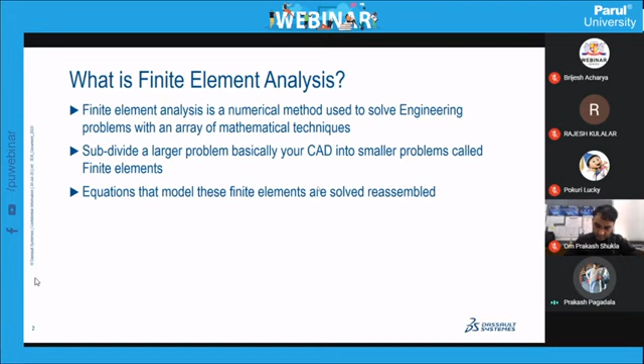Let's begin with what finite element analysis is. If you go to Wikipedia or open any book, finite element analysis is a numerical method used to solve engineering problems with an array of mathematical techniques. You discretize a large problem or a large CAD model into discrete elements called finite elements. Then you solve the equations for these elements and reassemble it. This is what you learn

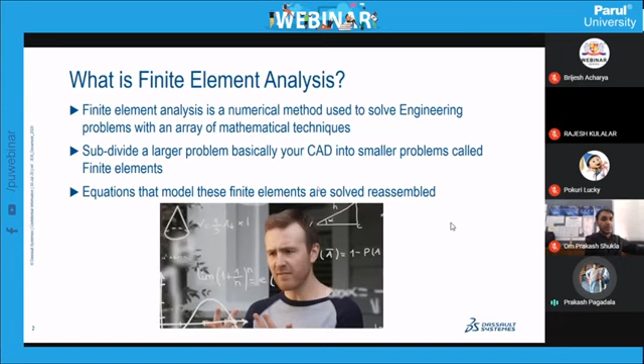in your books. But isn't it pretty confusing for graduate students? When I was in graduation, this was like some alien language for me. So I thought I'd learn in a simpler way rather than a complicated equation manner, and I started framing it for my own understanding. Let's break it down simply, okay?

You have a tree outside, and you're standing next to it. In a tree you have different components: branches, a trunk, leaves, flowers, fruits, roots, etc. All these components respond differently to the environment and also to you. If you pull a branch, it will bend, or if you take a leaf, it will crumble. But try hitting the trunk of the tree, what happens?

You're going to break your leg, okay? And why is that? Because the geometry and the materials of the different components are different. The materials are different, the shapes of the components are different, and how they respond is also different. The trunk of the tree is made of hardwood, while the leaf is made of much softer

material. If you break it down into basic components, you have the geometry of the tree, the general shape, and you have the materials. So within the FE world, these two things are really important: the geometry and the material. Geometry can come from CAD, and material you can imagine as something that fills the geometry. It can be steel, rubber, wood, or some composite material. It can be anything. So it is a fill.

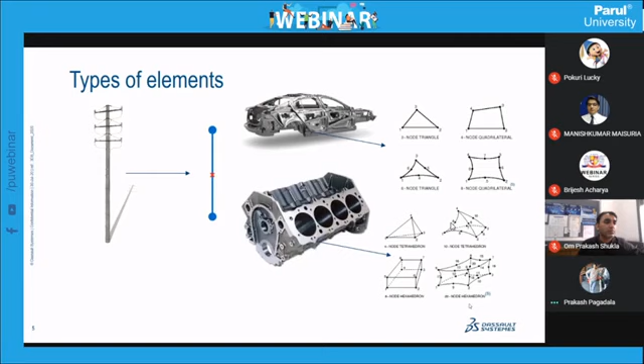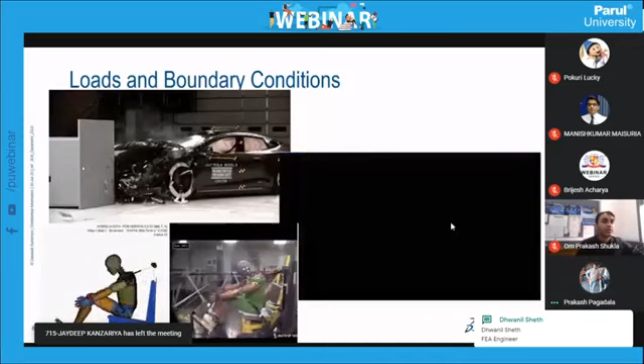Now, once we discretize with the elements, the next important thing is the loads and boundary conditions. What you see here is a car crash. You need to tell the solver, this is my boundary condition. The wall is a boundary. The car will hit the boundary at a particular speed, and the velocity will be the load for the analysis.

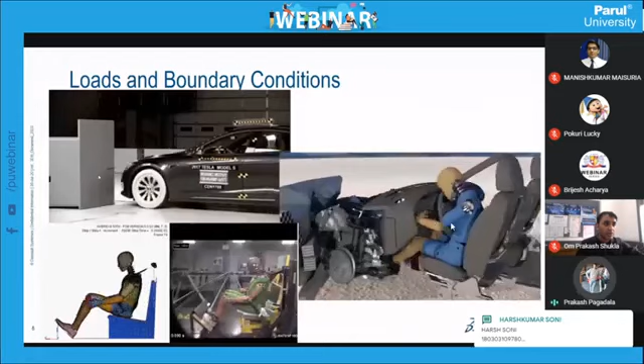So once you discretize, you tell the solver, this is my geometry, this is the discretized model, and the model possesses so and so properties like 2D properties or 3D properties. And this is the material I'm going to assign to these elements or fill the geometry with. Then you set up your loads and boundary conditions, where you tell the solver this is a constraint or this is the boundary condition.

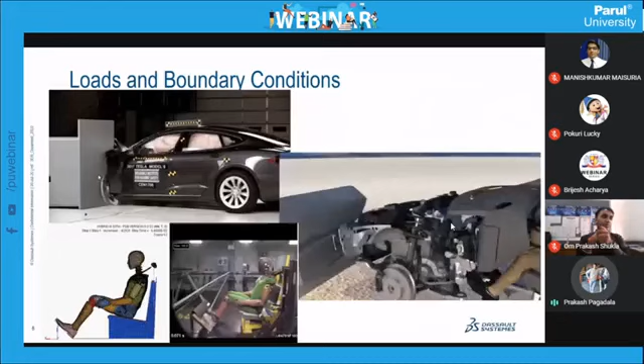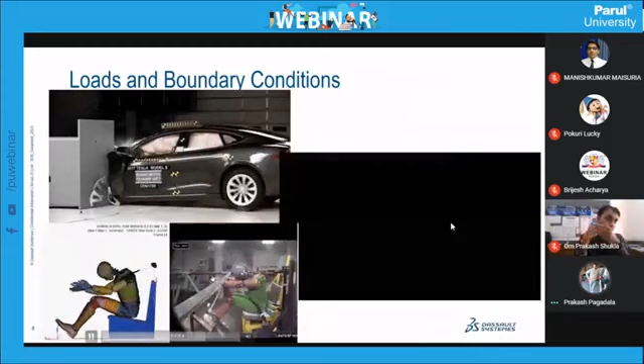The wall, for example, in this case, or if you look at the seat belt here, it crashes with the velocity. You're providing some loads and boundary conditions. This is the next step. This is how you start progressing from your CAD geometry to finite element geometry. Next is what solver you need to use.

Now, yesterday we discussed that we have different solvers like implicit solver and explicit solver. Now the question is, okay, now I have modeled everything. I have my geometry. I've discretized my geometry into finite elements. I've provided 2D elements, a 2D property with a thickness of 2 mm, and I have assigned a material to this. But what solver should I use?

That's the next question. Type of solver depends on the type of application where you're going to use it. For example, if you're interested in a high-speed dynamic event like a crash event or a drop test, like you're dropping your phone on the floor, the event time is like in milliseconds. So for high-speed dynamic analysis, we use explicit solver, and implicit solver for static or quasi-static simulations, linear dynamics. For such cases, we use implicit solver in Abaqus.

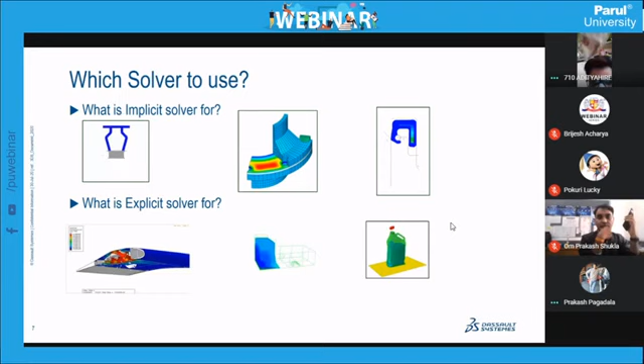So Abaqus has Abaqus Standard and Abaqus Explicit. Abaqus Standard is used for implicit applications and linear dynamic applications, whereas the explicit solver is used for explicit simulations like high-speed dynamic and nonlinear dynamic simulations.

So now let's see a couple of small demos on how we are going to use Abaqus for this. For these demos, let's start with a small demo.

Okay, just give me a minute. I'm pausing my presentation to open the Abaqus application. Okay, I hope you can see my screen now back again.

Okay, when you start Abaqus, you'll be asked what type of solver, or what type of model database you want to create. Since we are interested in structural simulation, we're going to select Abaqus Standard or Explicit. Now, this is the Abaqus CAE, which is a preprocessor.

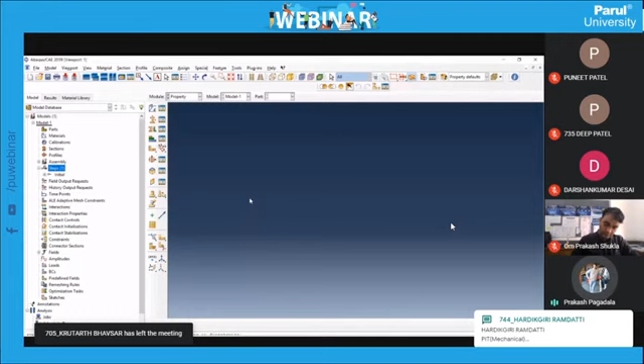Next is the property module. In this module, once we have created a part, let's say I have created a 3D block, the solver will not understand what exactly it is. So I'm going to tell the solver using the property module: this is a 30 by 30 by 30 block, which is a solid. I'm going to provide the section properties, like telling the solver this is a solid part.

And I'm going to assign some material. I'm going to tell the solver, this is my material, steel, for example, and these are the properties which the part will have, like Young's modulus and Poisson's ratio, etc. I hope you can see this here. So I'm going to tell the information like this.

Next is the assembly. Now we have different parts. I'm going to bring all the parts into the assembly module and I'll assemble them. I'll arrange them in a more logical sense.

Next is the step module. This is where I'm going to tell the solver, this is my block or this is my assembly, and I'm going to run a frequency analysis, for example a modal analysis, or a linear static analysis, or a transient analysis, through the step module. I'm going to create a, for example, 1 second.

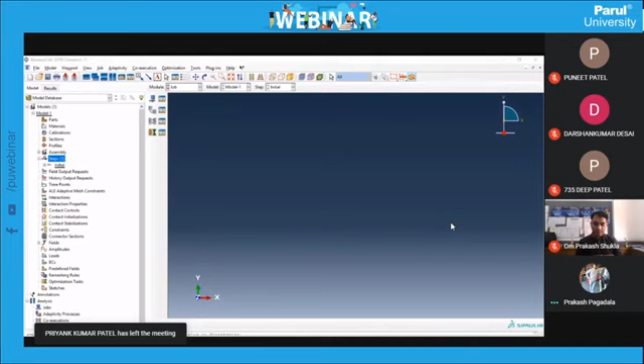After that, we have visualization, or post. This is where we post-process. Once we have a pre-processed model, we submit it to the solver. The solver did all the simulation and calculations, and it has given us a result: I've calculated your beam problem, now take the results. It will create a result file for us.

We'll take this result file into the Abaqus viewer, or visualization module. Then we are going to see the displacements for a particular given load or force, or the stress, for example, whatever we are interested in. I hope you understand the different modules which I have explained.

Let's start with creating a sample problem, or a set of problems, not just one, to get a taste of different types of simulations, maybe 3 or 4 simulations, maybe one optimization as well. We are going to start with a simple plate problem. My plate will be a 2D plate, which is a thin sheet.

So in the part module, I'm going to create a plate. Okay, this is a thin sheet. I hope you can see this. Okay, now I've created this. Now I'm going to tell the solver, okay, I've created a plate, or this is my geometry. Now I need to tell the solver what is the thickness of it. I didn't mention any thickness here in the part module.

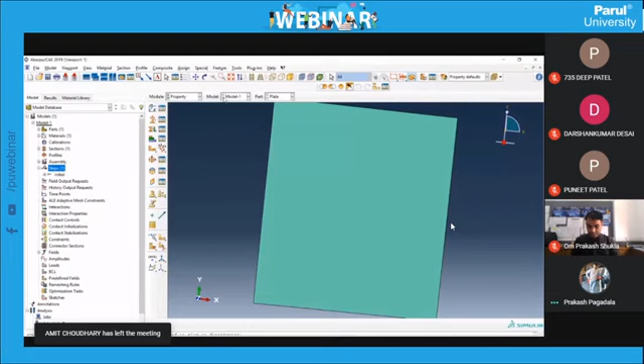Next, we are going to assemble. Since we only have one single part, we are not going to go in details, but we'll discuss this later. Now, next is what type of simulation I'm going to use. I'm saying I'm going to use a static simulation for this. Static simulation is where your geometry and your... linear static is nothing but where your loads and material are linear. You are applying at one single instance. So this is what we call static, and dynamic is like transient dynamic, where your load may change with respect to time or frequency. That is a different discussion again.

Okay, I'm saying I'm dividing the load into increments. 10% for each increment. Since we only have one single part over here, we are not going into the interaction module. Next, we are going to create the loads and boundary conditions. This is where we are going to tell the solver where I'm going to fix it and where I'm going to apply the loads.

Okay, so I'm saying force. Continue. Okay, I'm going to apply some load here and here on these two nodes. This will ask me how much load I need to apply. I'm going to apply in X direction. You can see the three axes here, X, Y, Z, and you also see a compass over here. This will come in handy. I'm going to use 10 newtons of load. Okay, you can see the representation of the force here.

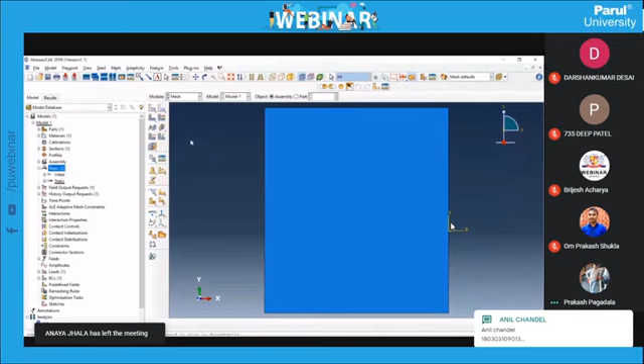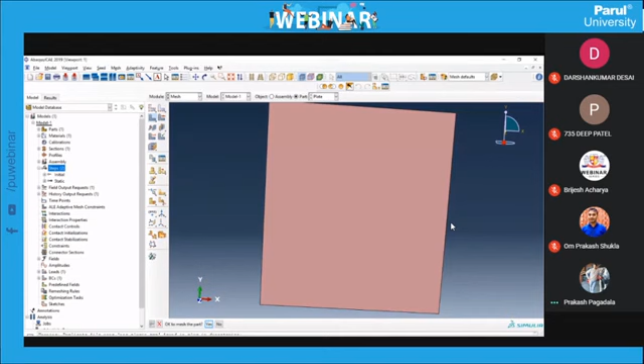So as I've said, each element has a set of nodes associated with it. Now we're going to tell how many nodes, what is the size of... okay. Now we have discretized it with so and so element size. You can see it here, right? So here you can see the approximate global size is 5. So the average size of my element is 5.

Okay. Now once we have meshed it, that means we have discretized it, next is to run the simulation. We are going to the job module. We're going to give a name to it, plate for example. And I'm going to use more number of CPUs. It's like you're using more number of brains. So this will help me to speed up my simulation.

Once you submit it, it will start. It will communicate with the solver, and the solver will calculate the equations. It will do the math in the background and will give us the result at the end of the simulation. You can see it is running. The simulation is completed. You can see it in the status.

Then we'll go to the visualization module. Now you can see how it is deformed. Since we applied the load only on the 2 nodes of this plate, only the nodes are pulled. Okay, so this is how you model in the Abaqus CAE or Abaqus GUI. This is a simple problem we have just created.

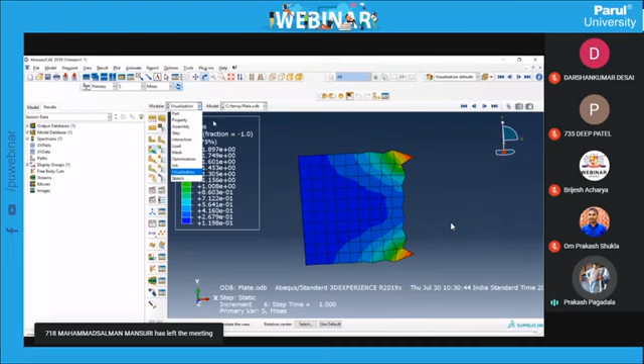Now let's do another simple analysis on the same plate problem. We'll do some frequency calculations. We'll remove the force over here and do a simple frequency analysis. I'm going to the step module. I'm just simply changing it. I'm going to replace it with frequency. This will ask me for the minimum frequency of interest. I'll say 1.

I'll provide how many frequencies I need, number of eigenfrequencies requested. I'll say 10, for example. So I'm going to ask the solver to give me 10 available frequencies starting from 1. And then I don't have to do anything now. I'll just go to my job manager again. I can resubmit it, but I'll not do that. I'll create a frequency job, rename it, and submit it again.

So for the same problem, without doing anything, I've just changed the step or the type of analysis. That is the beauty of finite element simulations. If you're doing this in a real problem, you might have to do a lot of iterations. There are some warnings over here. Maybe I've made some mistake.

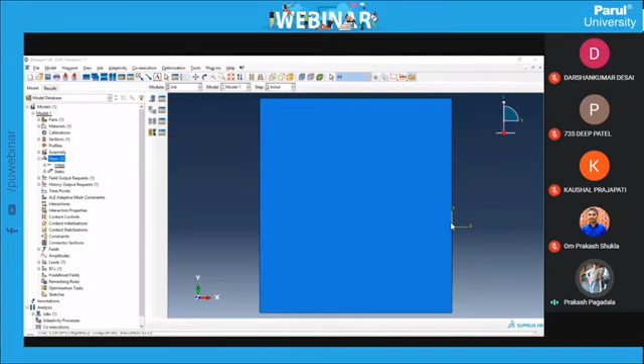Now, if you have to do the same in a real problem, you need to do a lot of iterations. Maybe you need to change a lot of things here and there to change from one simulation type to the other, which might take a lot of time, money and manpower. You can see the problem is running now, and it is completed. We're going into visualization mode.

So we have the frequencies over here. We requested 10 frequencies starting from 1, and we have 10 frequencies. The first frequency is 851. The last frequency is 17430 for this particular problem. This is a different type of analysis we have done without making any huge changes in the model.

Similarly, you can create 1D elements, like if you're dealing with truss kind of problems, okay? Excuse me. And you can start modeling your problems and solving them in Abaqus.

The steps are not clear. So there's a question from Saumya Trivedi saying the steps are not clear. Can you let me know where you got lost, or from where you want me to explain? Sir, the steps when you applied the load, it is not visible. I cannot see where you applied the load. Where I've applied the load. Okay, we'll take another problem and discuss the load. Thank you.

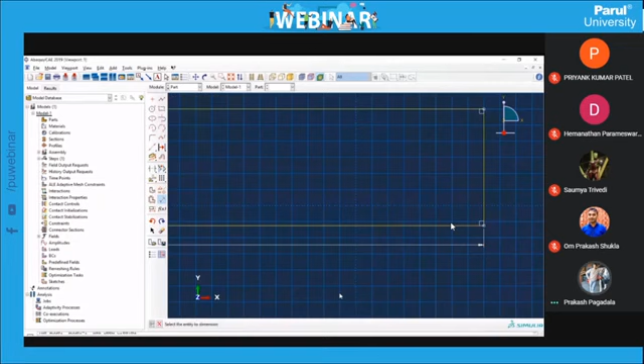Right. So we'll take another problem, a little complex; we'll have some contact in this problem. We'll start with maybe a block, which is a solid. I'm going to create a block with some dimensions in my part module. My length will be around 600, and the breadth can be around 200.

Now, since it is a solid model, this will ask us for the depth, the thickness. We're going to use a default thickness of 20 mm. Now, this is my block. Then I'm going to trim this at a couple of places for better modeling.

I'm creating some trim lines. So this will help me to... Okay, I've trimmed the block at these two ends. Now why I've done this, we'll look at in the later stage.

Now you might have heard about 3-point bending analysis, right? So we're going to create a 3-point bending with 2 supports and one block, something like this, and a load carrying block. We'll say load block, and we'll create a rigid component for this because we are not interested in the deformation of the block. Okay, let's make it.

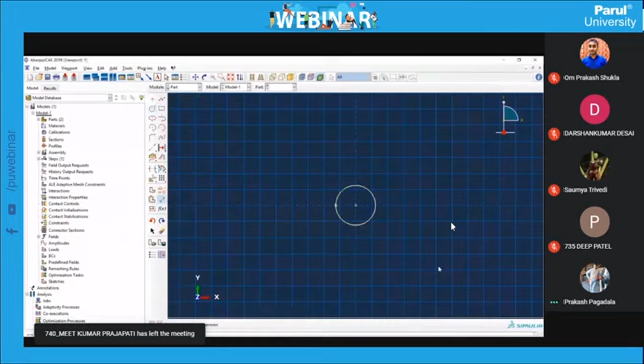I'm going to give dimensions to it and a depth to it. I'm going to give a reference point because since it is rigid, we need to provide some details to it. Now we are not going into details of what reference points are and why they are used, but for the time being, we're doing this. Okay.

Then next we are going into the property module. Since our load block and support CAD models or geometries are rigid, we don't need any material for that, because we are telling the solver these are my rigid components, and rigid components don't deform. Okay, so we are not interested in that. Now we are going to apply some material for the block. Going to use the same steel properties.

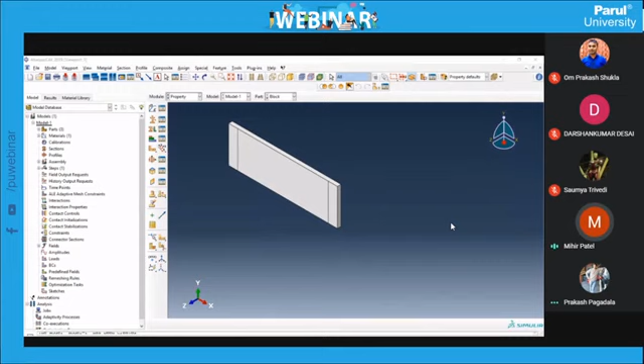Excuse me, sir. Yes. Hello, sir. Sir, actually, whatever subcommand window opens, where you are entering the material or load condition, that is not visible. Now you can see the window over here, the edit section window. No, sir. We can only see the Abaqus main model window where the slab is. That's it. Okay, let me reshare. I'll stop the sharing and I'll reshare it. Okay, thank you, sir.

Okay, can you confirm if you're able to see now? Yes, sir. We can see. Okay, now you are able to see the edit section window and everything, right? Yes, sir. We can see.

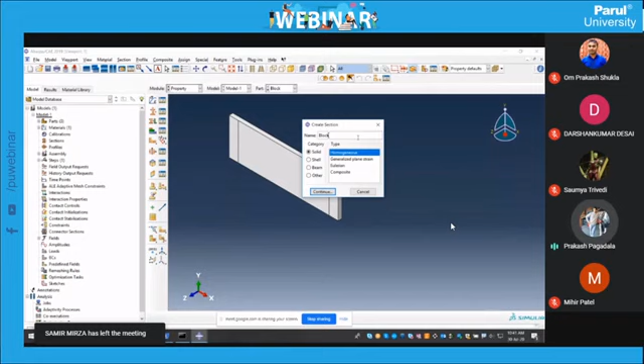Okay. So what I've done is I've created some material property, given some material details over here for steel. Next, I'm providing some physical property to let the solver know that this is my solid component. Then I'm going to assign this to my block. Done. Now we are going to assemble these three over here.

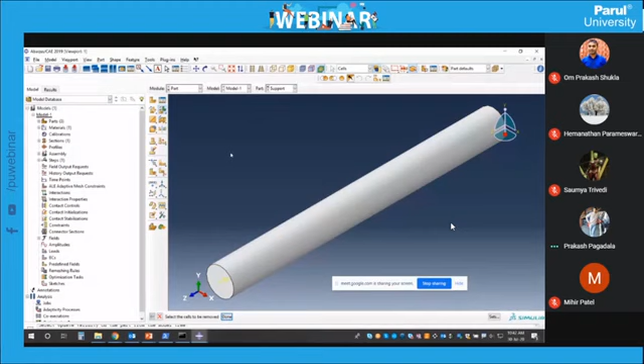Okay, I cannot use a rigid. So what I'll do is I'll go to part. Since I cannot use a solid rigid, I'm going to convert the solid rigids into a hollow rigid. Then I'm going to the assembly module. I'm going to assemble them over here. Now I have three components here. Okay, what I'll do is I'll assemble them with some conditions.

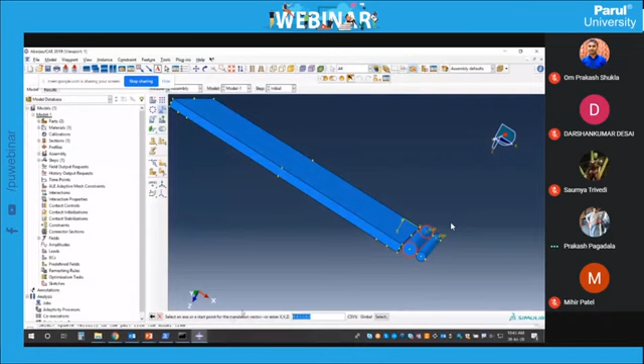This is a parallel face condition, which means the faces which I've selected should be parallel. Okay. Then I'm going to position them. I'm going to rotate this around this axis. I'm going to rotate this component, this part, by 90 degrees. And again, I'll do the same for this, for better modeling. Okay.

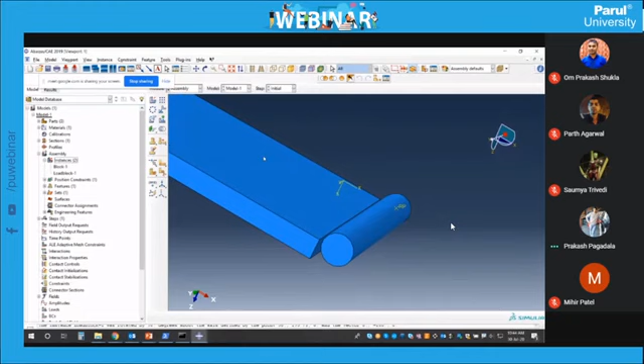Sorry. So as I've said, everything will be recorded over here. You can do any modifications anytime. Okay. First, we'll position this over here. I'm going to use the translate option over here. This will translate this over here now. Okay, have you seen this? This has translated from one position to the other position.

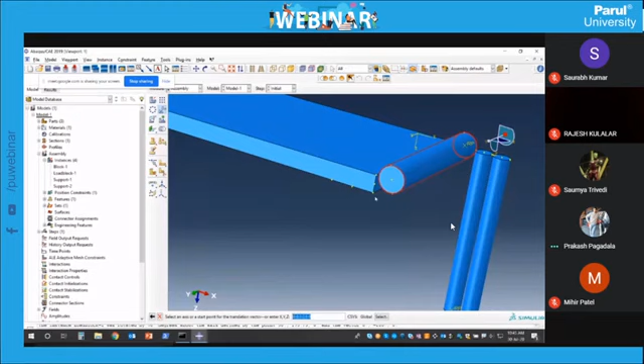Now, I have created only one support part, but I've instantiated it twice. So this is the beauty of Abaqus. You don't have to model repeated components multiple times. Okay. Done.

Then I'm going to use parallel faces for this. Again, also for this. Sorry. Okay. Now I'm going to rotate this around this axis by 90 degrees. And again, this on the same axis.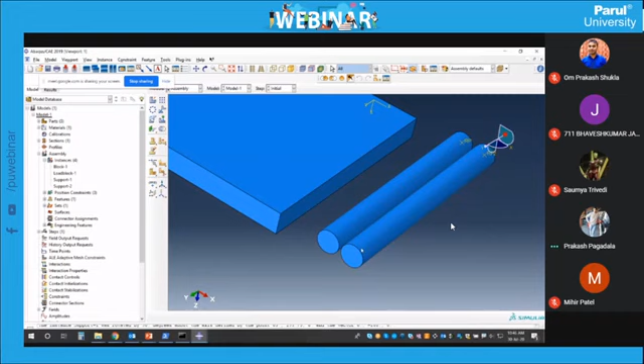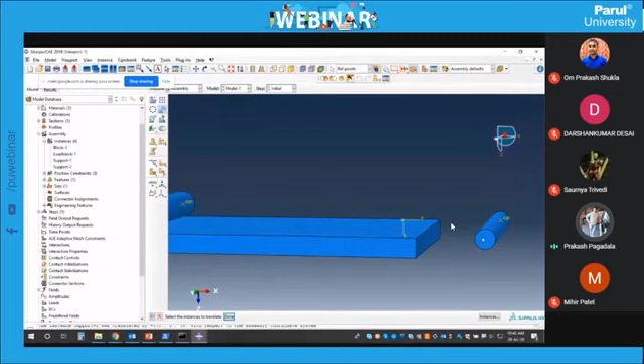Then we're going to position them using the same options we have used before. So select this point here. Okay, done. Next, we're going to position this. Okay, this is not rotated.

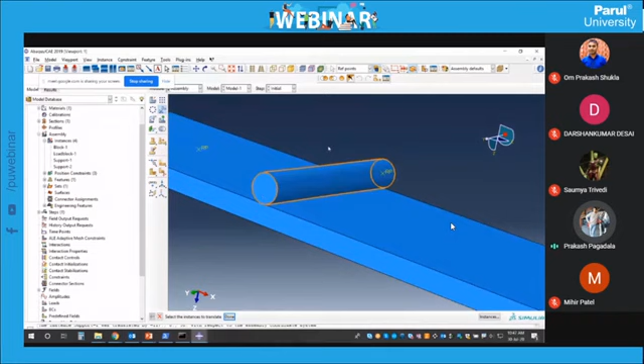Then we're going to position this point coincident with this point. Okay. Now we have positioned our 3-point bending setup. Now we have two supports and one load bearing component. Okay. So I have trimmed these lines, if you remember, at the beginning for the block, just to take a reference of this to position the supports.

Okay. Then what we're going to do is we are going to create a step for this. We're going to have a general static model, and I'm going to divide the load. So I'm asking the solver to apply 10% load, not all the load at a time, but 10% load as an increment, okay, until the full load is absorbed.

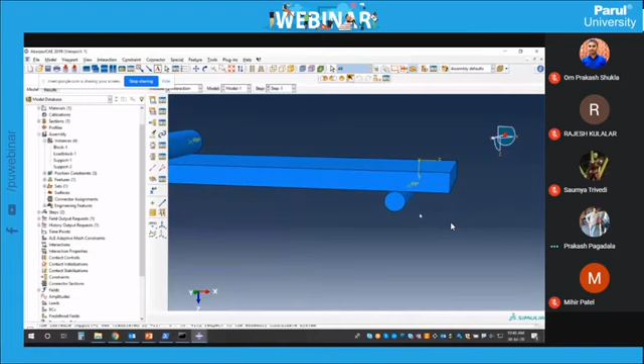Next, I'm going to create contacts. Now, the conventional way of creating contacts is a very lengthy process in some preprocessors. The process is like, you need to select the surface of one component, then select the surface of another component. You create a contact for it, then you repeat the same for this, for this, for this. Now for this component it will take at least 5 or 10 minutes for me to create. But if you have a huge assembly, it might take a lot of time for you.

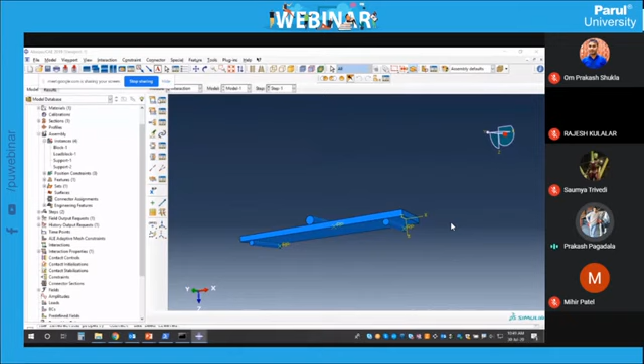Okay, so one advantage with Abaqus is we have something called general contacts, where within one click you can create contacts for the entire assembly without repeating the process. So first I'm going to create some contact properties. So I'll provide some friction to this, say 0.2. My coefficient of friction is 0.2. Then I'm going to create something called general contacts.

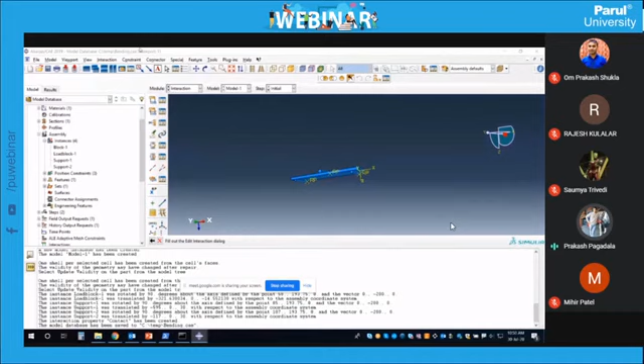Okay, looks like I have some problem with this. What I'll do is I'll save this for the time being. Okay, let me end this. Just give me a minute. I think I have some problem with the window over here. I'll stop sharing this for a minute. I've restarted because I'm running some other simulation. I had some problem with this.

So I'm going to continue from where I've stopped. So we have assembled it. Now we have also created a step. I think we also created a contact property, interaction property. Then we are going to create general contacts for this. So we are going to say general. So you can see here what you want to include in the contacts. You want to include all the components with self contact.

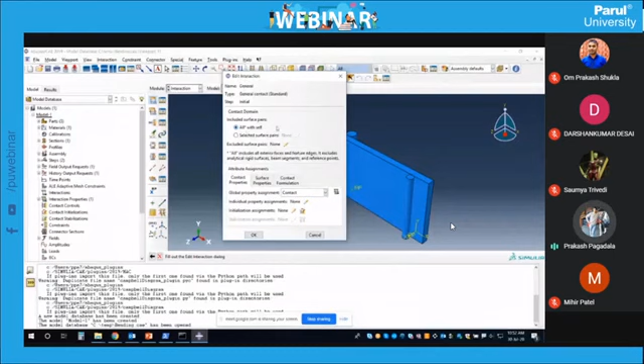Self contact is where the same component comes in contact, like a crumbling analysis. Maybe we'll look at this in the next demo. So you can imagine a crumbling or a crushing kind of thing, which is a self contact. Okay. So I'm going to tell the solver I'm going to have everything in contact in the assembly, and I'm referencing the contact properties for this. Now the interactions are created. Next, I'm going to create the loads and boundary conditions.

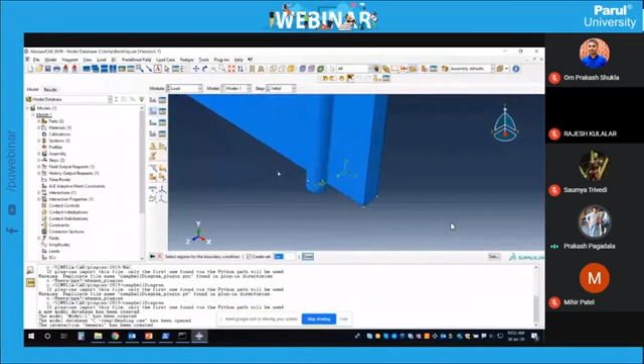I'm going to fix this and this in all directions. So I'm not allowing these rigid components to move at all. Next, we'll provide a displacement load. Okay. I'm going to select this. I need a displacement in Z direction. I'll displace it by, say, 0.5 mm. Okay, and in all other directions it is 0.

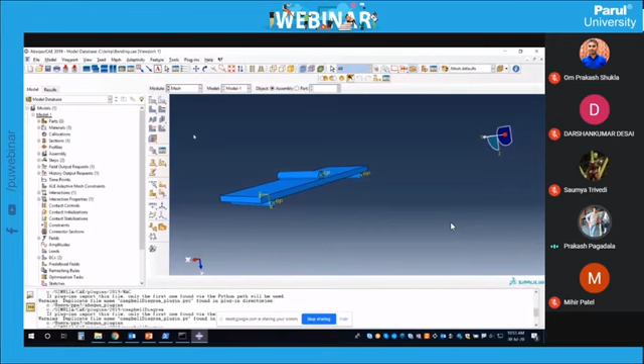Okay, now we have done. We have created the assembly. Then we created the step. Then we created the interaction, where we have created the contacts. We have created the loads and boundary conditions. Next, we are going to mesh the components. So we'll provide the basic details on our average element size, say 10 mm for this. Okay. Then we're going to mesh this part.

Then we are going to move to the load block, which is the top block we have created. Okay. Then we can go to the support block. Now, if you remember, we only created one support block, but we have two supports. What we have done is during the assembly, we have used the same one a couple of times. At one end we have one support block, and at the other end we have one more support block. That's the beauty of Abaqus, where you can create one single part and instantiate it multiple times when you have it repeated in your assembly.

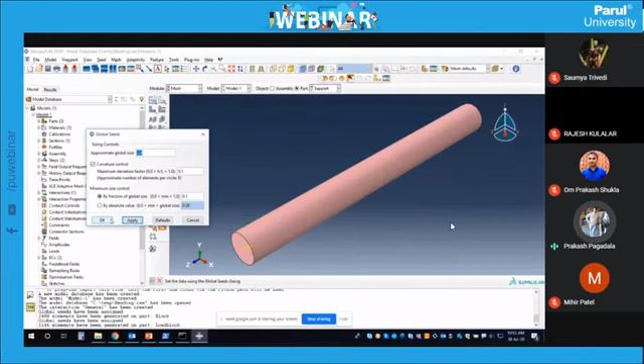Okay, and it is not necessary you need to mesh it for all. Like if I'm using it 10 times in my model, it doesn't mean you need to mesh it 10 times. Only one time is enough. So if you're meshing the parent part, it will be reflected on whatever other components you have created. Okay, so we are going to provide some details on the mesh, and we have created the mesh for this as well.

Next, now we have assembled, we have created step, interactions, load, mesh is also done. You can see here, this is the assembly, how it looks after the mesh. We're all done. Now we can go to the job module and let's create a job. So once we submit on the job manager, it will write out an INP file. This is a form of model file.

Probably I don't have any INP file over here, but what we have done is we have created this bending. So this is the INP file, .inp file, which Abaqus exports as a model file. This file will be taken to the solver, and it has all the details, like what parts we have created. We have created a part named block, and these are all the nodes for that part. Each node will have its x, y, z coordinates. This is the x coordinate, this is the y coordinate, the z coordinate, and this is the node number.

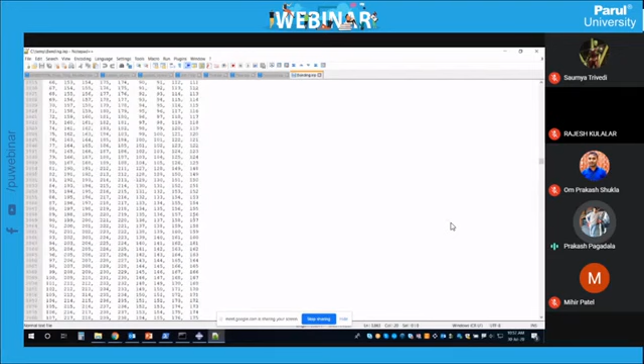Similarly we have elements. What is the element type? This is a solid element, C3D8R, which is an 8-noded 3D hexa element. Now each element will have its element number and its node IDs, and it will have other details like the general contacts we have created, and other assembly details over here.

Assembly, what are the assemblies we have created? We have a block, we have another load block which holds a load, and we have two supports which are instantiated over here. We have created some material properties, which are over here. The boundary conditions, we have displacement and fixed constraints. It is also written, and interaction properties, which are the contacts. Now everything is written. At the end it will also write out the step information.

Okay, I think I had too much load on it. This is how it will write out. So this file will be submitted to the solver, and the solver will understand what is what from this file, and it will try to calculate based on the provided inputs. What I'm going to do is

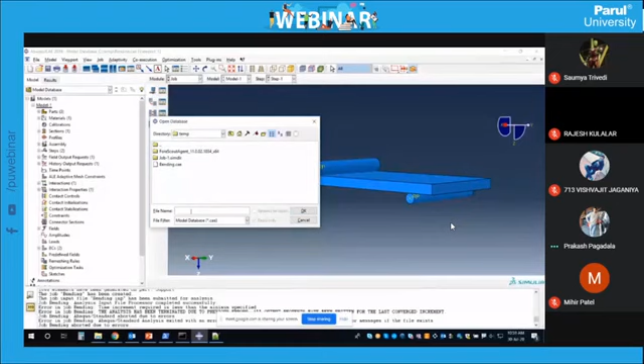Okay. So this is the result after the analysis. Now you can take the result file. Once the analysis is completed, the solver will write out the results in the form of an .odb file. This will have all the calculated results like your stress, your displacement, and everything. You can use this for further post processing.

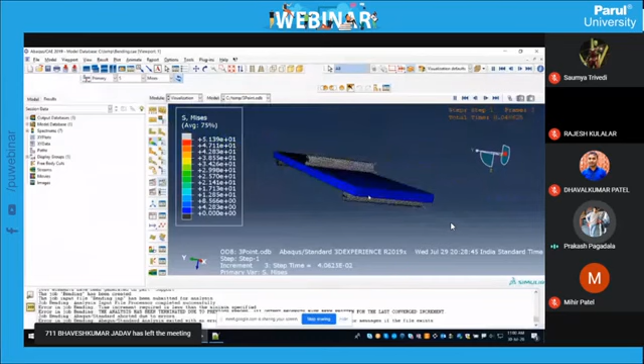This is how you model some complex problems in Abaqus. For some reason, the analysis I've carried out didn't go well, but let us not waste time on it. Maybe something to do with my contacts. But this is how the result will look once you have everything in place. Now, since this is the only deformable component in the assembly, we can only see results for this. These are the rigid components, and we are not interested in them.

Since we are only interested in the block, which is deformable, we have only created a single deformable component for a faster simulation. When you have more deformable components, the simulation time will increase. So this is about using implicit. This is more of an implicit solver, implicit simulation.

Next, we'll see explicit simulation as well. We'll try to create something in explicit. Let's see a crush analysis where we're going to use self contacts, a tube crush. So what we're going to do is create a hollow tube of, say, 100 by 100 mm, something like this. Let's extrude by 100. Okay, 100 may not be enough.

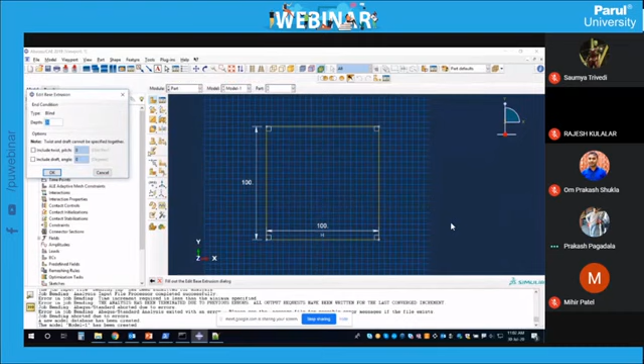This is my tube. So what I'm going to do is I'm going to crush this tube with a solid block. So for that, I'm going to create a solid block. So we have created 100 by 100 for that. So we're going to create 120 by 120 for this, so that we can have a better. We're going to create a square block, something like this.

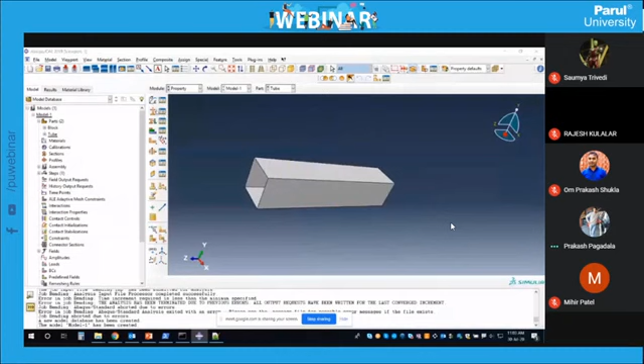Now we have created a square block, and we're going to attach a rigid reference point for this, since it's a rigid component. Then we are going to properties. Let's assign some details to this. Let's assign some material. Now we'll use aluminum material, for example. Some form of aluminum. Okay.

Let's set the Young's modulus and Poisson's ratio. We'll also provide some details on plasticity. Like we're going to include the material nonlinearity in this. Okay. Now we have created the material.

Now we're going to tell the solver what type of component it is. A shell component which has some thickness. Let's say thickness of 2 mm. Okay, and we are assigning a material to this. Then we are going to attach element and property to this. Okay, next we have the block.

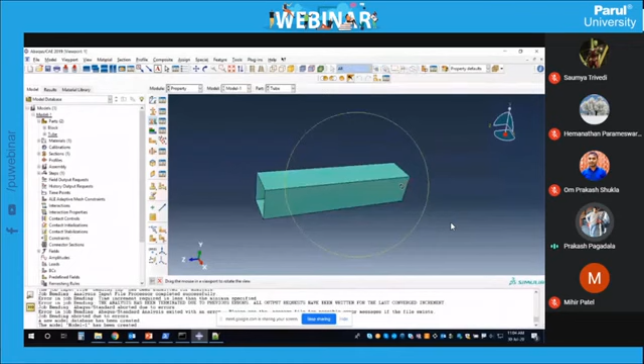Since it is a rigid component, but we are using a dynamic explicit simulation. So when you are using a dynamic simulation, you need mass. Okay, since it's a dynamic simulation where you have your inertia and everything, you need mass for this. We're going to create some properties to this. We're going to say like what is the mass? Maybe 1 ton. Okay, 1 ton, and some random shape properties for this.

Then we're going to the assembly module. We'll assemble these two. Okay, I have created a solid. What I'm going to do is I'm going to convert this into shell component, assembly. Okay. So this is how you do it. And we're going to translate this.

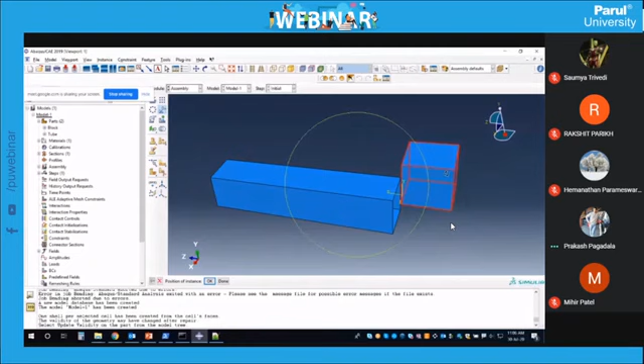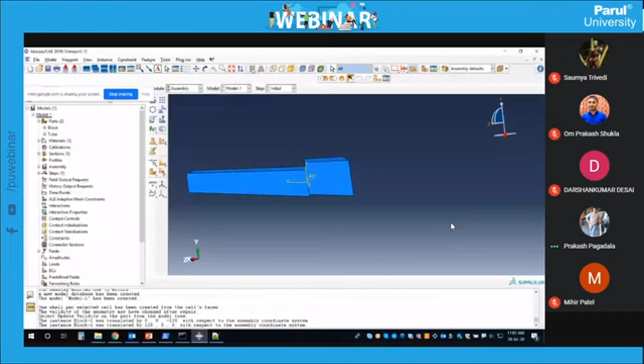Okay, again, we're going to translate this so that this is how we are going to position the y direction. I need to position this in negative y direction by say 15, something like this, but maybe more than that.

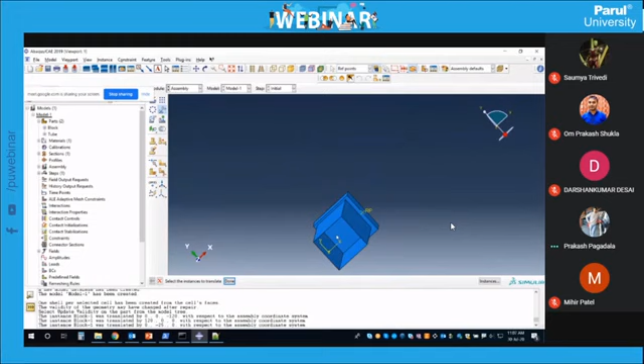And now we have positioned it. This may not be the right position, but we can actually work with it for time being. To have a little gap between these two components. Okay, now we have assembled it. Now I have a tube and I have a block, and this block is going to crush the tube.

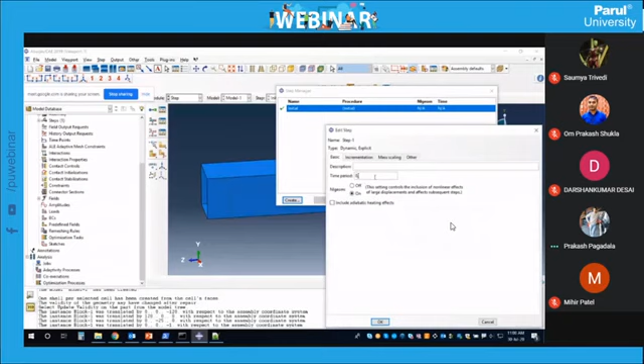So in order to get it crushed, I need to create some constraint for this and also contacts. What we are going to do is we are going to tell the solver that I'm going to use explicit analysis for a period of say 0.1. So my event time is 0.1. Okay, next interactions. I'll create interaction properties first. Some friction of say 0.1.

General contacts for explicit. Including the self contact. So once the tube gets crushed, the same component or the elements in the same tube will come in contact with each other. So this is called self contact, and general contacts will help in creating that. Next is the loads and boundary conditions.

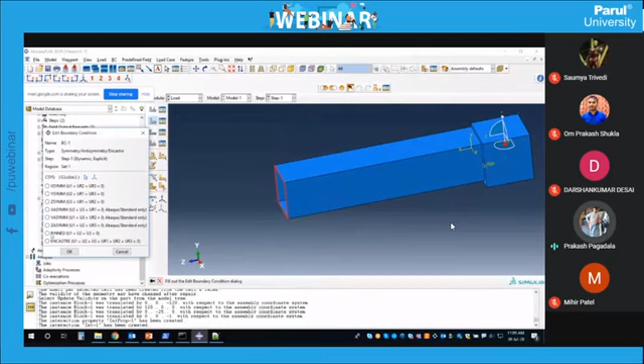What we are going to do is we will constrain, or it's like we're going to fix the edges on the other side of the tube in all directions. Okay, and we're going to provide velocity to this rigid body in z direction, say like 500 mm per second of velocity.

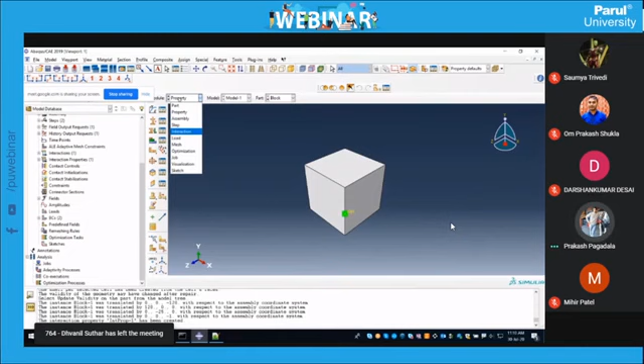Okay. Now we have created the assembly. We have provided the physical properties and material properties for the tube. And also we are going to tell the solver that this block is a rigid component and it has a mass of say 1 ton. Now we have created the loads, boundary conditions. Next we are going to mesh the component.

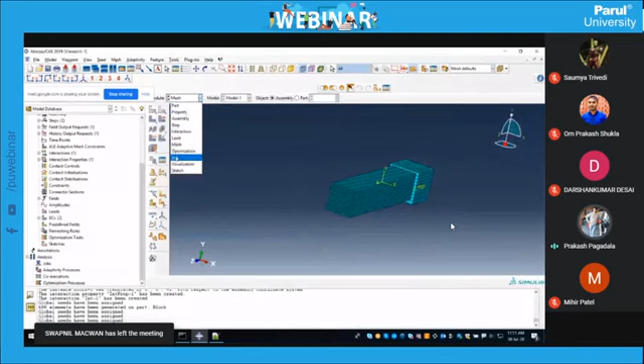Done. Next we'll go to tube. It may be very less. We'll make it 35. Okay. Now we have our assembly ready. We are going to submit to the solver.

You can see the solver has taken the input file and it started. It will check if there are any modeling errors. If there aren't any modeling errors, then it will start the calculations. If there are any errors regarding the calculations, it will stop the analysis and it will give you the details of it.

You can see these are the intermediate results. The analysis is not yet completed, but you can see the results over here, how this tube is getting crushed because of the block.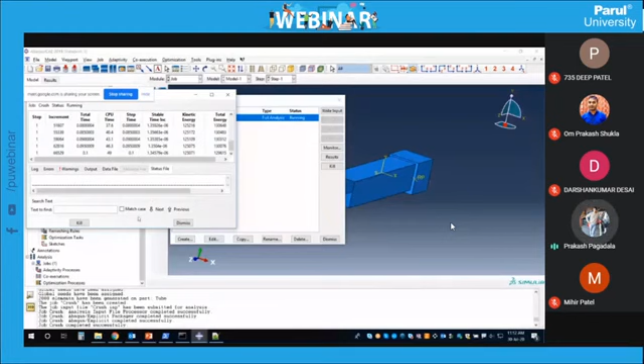So you can see here, so far it has done the analysis for 0.09 seconds. Once it absorbs the complete load, the analysis will come out and we can see the results.

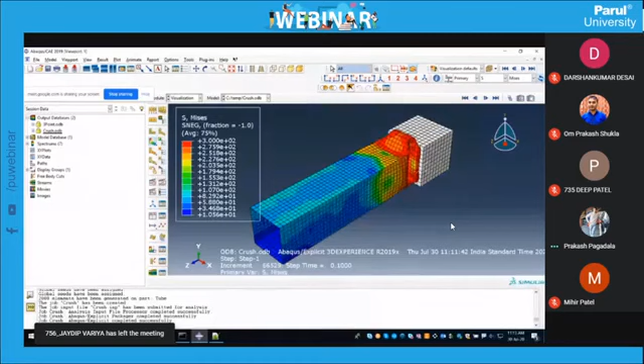You can see how it is getting crushed. This is how it gets crushed over here. You can see it here. You can see here the elements are getting in contact with each other, and because of that, they're using self contact for this.

This is all about how you model for explicit simulation. It hardly took like 10 minutes for me to create this. It's pretty easy. Everything is logically organized. Okay, so it doesn't mean you have to go according to this. It's up to you. You can mesh the component first and you can apply the load later.

Anything is possible. Okay, so when we say it is logically organized, it doesn't mean you need to follow the same chronology. It's up to you how you want to model your components. Okay.

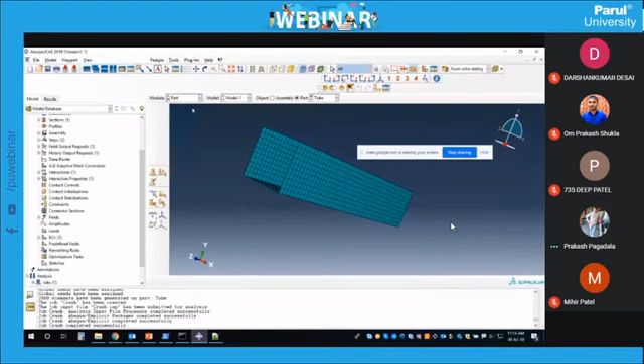We'll see a small problem on optimization also by importing the existing plate model we have created earlier. This is a plate model, if you remember, which we created at the beginning. Okay, it has some property and we have assembled it. We have provided the load for it and also some boundary conditions. Okay. I'll probably change the load for this.

What I'll do is I'll select all the nodes. Done. Okay. I have the loads over here. What I'll do is I'll do a topology optimization on this plate. So I'm going to tell the solver, okay, I'm doing an optimization, which is a topology optimization. And this is my region of interest. Okay, so I'm telling the optimization solver, this is the area where you need to perform the optimization. Okay.

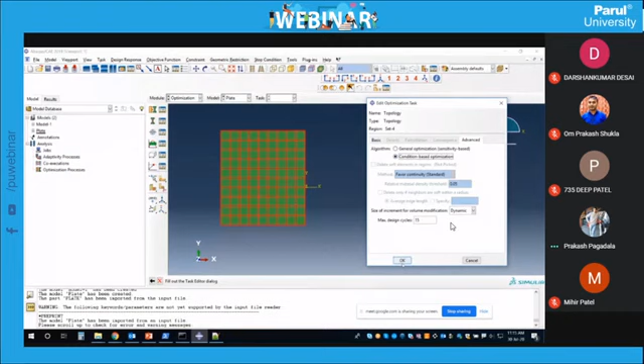I'm not going into details of what is sensitivity based optimization, what is condition based optimization, but for the time being, I'll show you how to do it. Next is the responses. So like you have loads and boundary conditions for a general analysis, for optimization, you need some conditions. So what are the conditions? Conditions are nothing but your constraints, optimization constraints, and optimization objective.

What is the objective? Whether you want to reduce the stiffness, or you want to increase the stiffness, or increase the mass, or reduce the mass, or increase the stress, or reduce the stress. These are all your conditions. Okay, these conditions can be your objective or can be your constraints. So I'm going to create such conditions over here.

What I'm going to do, I'm going to ask the solver to give me a best shape with a... first what I'll do is I'll create two conditions. One is volume and one is strain energy. Strain energy is nothing but your stiffness. Okay, I'll tell you how it is used.

So minimizing strain energy is nothing but asking the solver to give you a structure within the same domain, within the same design space, for the given set of loads and boundary conditions, to have a better structure with better stiffness or same stiffness with reduced volume in this case. I'm asking the solver to provide a design with minimized strain energy.

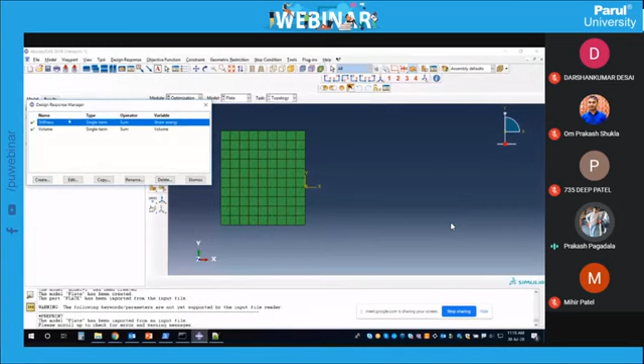I've created everything here. Okay, I've created it, telling the solver to run a topology optimization. I have two conditions: one is stiffness and one is volume. Okay, my objective is to maximize the stiffness, or minimize the strain energy in this case, and the constraint is to reduce the volume of the provided structure.

Then what I'll do is, okay. Then I'm going to submit the job or the input file to the optimization solver. Okay.

So in order to run an optimization, you need a design space. It's nothing but the area where you want to perform the optimization. Okay, design responses. Design responses are nothing but the conditions I've shown you. Okay, like objective conditions and your boundary constraint conditions. These are your responses. Okay.

Here in this case, I've used strain energy and volume as my responses. Strain energy is my objective, and volume is my constraint. I've asked the solver to give me a better design with a reduced volume and better stiffness. It started, the solver is running. It will keep on iterating until my objectives and constraints are met.

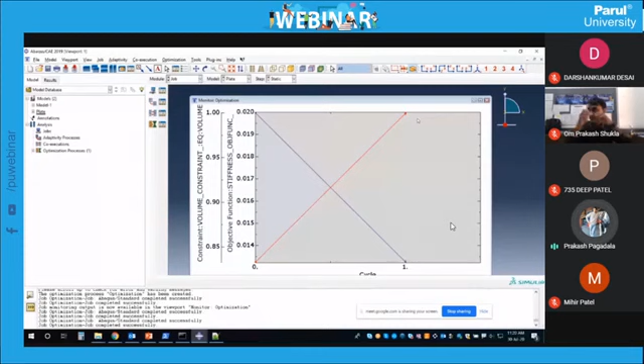You can also plot how the trend is going, like how my objective and constraints are following with respect to each iteration, my stiffness. You can see here the stiffness objective, which is in red. It is trying to increase the stiffness, and the constraint, it is trying to reduce the volume here.

So you can see my constraint is to have at least 50% of volume. It is trying to reduce the volume here, at the same time minimizing the strain energy for a particular iteration over here.

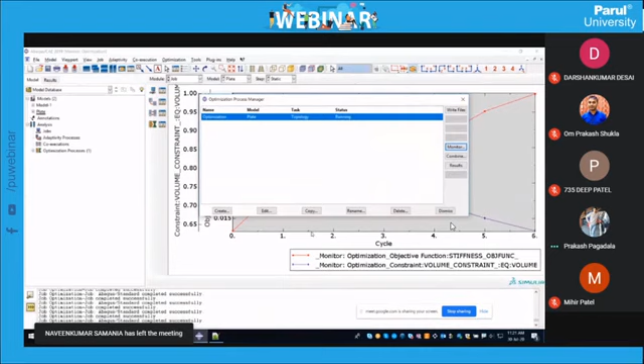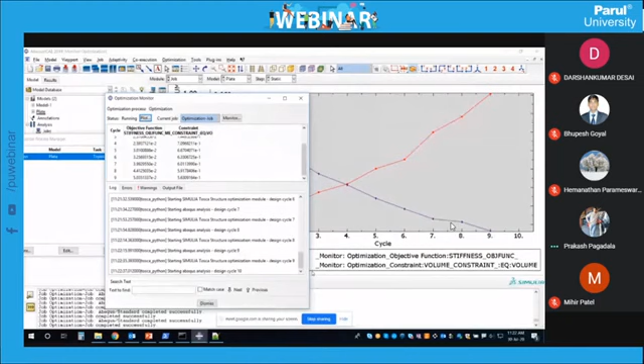I'm sorry, this is taking some time, but let's wait for the solver to come out with the result. Stop sharing screen for a minute. We're almost coming close.

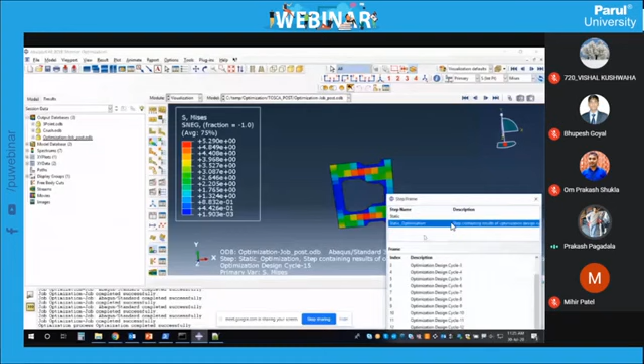You see here, this was my initial shape. Then the solver slowly started removing the material. You can see this is what is unnecessary. What you can see is the red ones are retained elements, and the blue ones are being removed, which are not really important, not really contributing to the stiffness. So this is how the solver will try to provide us a better result.

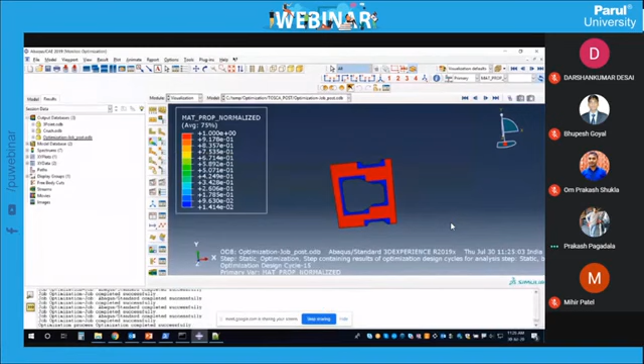So you can see here, the solver has given an optimized shape. So this has reduced the weight of it. At the same time, it has retained the stiffness of the component without actually disturbing the stiffness. So this is how you do optimization, not just topology optimization.

You can also do bead optimization or topography optimization, where you move the nodes of the elements of a 2D structure. Okay, if you look at your government buses, the floor, you have some beads on it, right? So it is basically to improve the stiffness of the structure. So you can use it for such applications where you want to improve the stiffness or increase the frequency, for example.

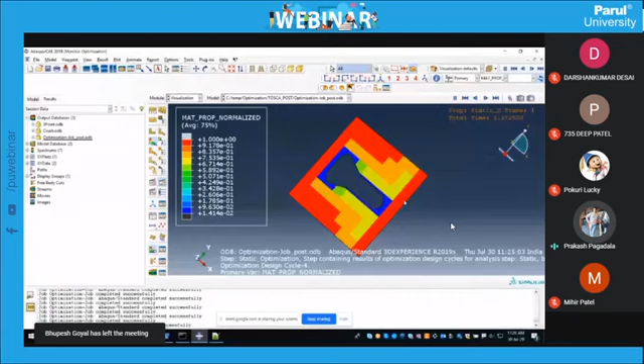And you can also do size optimization, where the solver plays with the thickness of the sheet metal components. Or you can do shape optimization, where the shape of the 3D structure will be changed. Okay, this is how you do optimization with Tosca in Abaqus environment. Tosca also has its own graphic user interface, but I'm not going into that for the time being. But you can do optimization through Abaqus CAE itself using the optimization module.

Okay, let me go back to my presentation. I'll stop presenting for a minute. I hope you can see my screen.

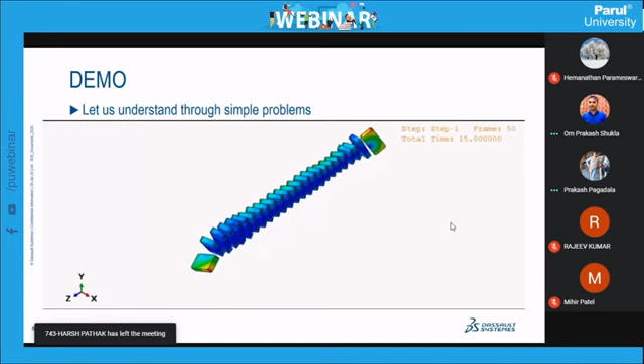For example, let's say way back in the 1990s or maybe in the early 2000s, this is how you do the project. Now when you have a project, you have a group of people. Okay, a project cannot be done by one person. Let's imagine you're building something. In this project you have an engineer, a design engineer, a marketing guy, a programmer, and a simulation guy, etc.

In olden days, you have to brainstorm, you have to manage the data, a lot of things, a lot of headaches. You need to communicate through email chains, etc. Emails and communication, a lot of mess. Now, after that, we have some simulation, high performance computing, etc. But still, you need to exchange the emails.